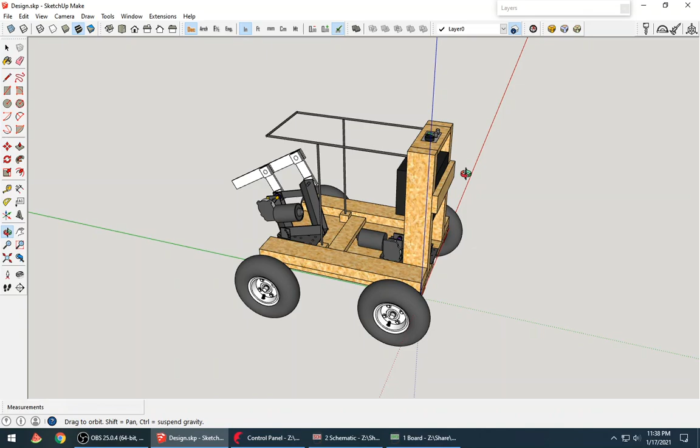I called it Hard Raker. The whole thing uses one motor to go backwards, adjustable here, and then another motor. These are, I believe, windshield wiper motors for cars, and this one rotates this arm which the rake head is attached to, so it just rakes while it's going backwards, and it's really tiring.

I thought about this a couple of months ago, on the grass when I had a spot with the fungus or whatever. I treated it, but whatever died, and I just raked it to get to the bare soil, and aerate the soil a little bit.

Generally, I'm having some thatch problems. Not so much a thatch problem, but the soil, I believe, does not have that much organic activity, like microbial activity going on. That's why I'm doing the compost. I'm trying to establish a good soil, at least the top inch, so it can decompose the dead grass and leaves itself.

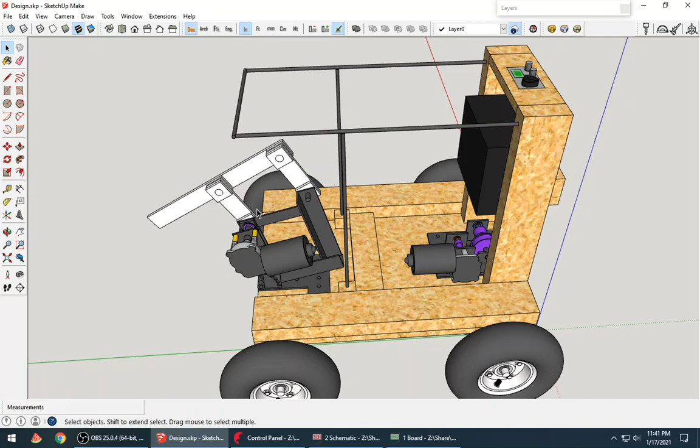This will help me get rid of that. I already used this. I made some changes, some adjustments for the belts. Okay, let's start from the rake part.

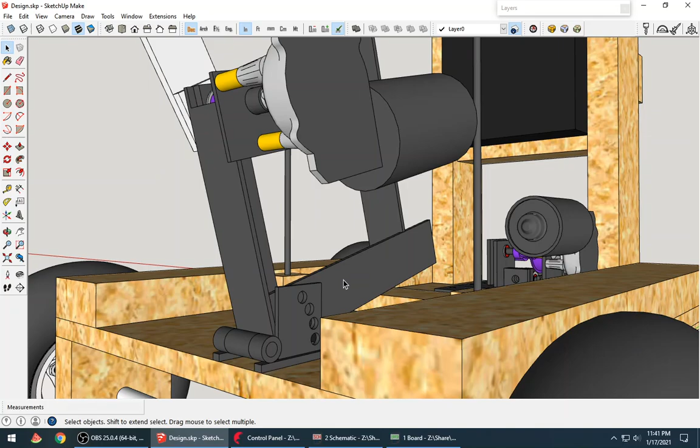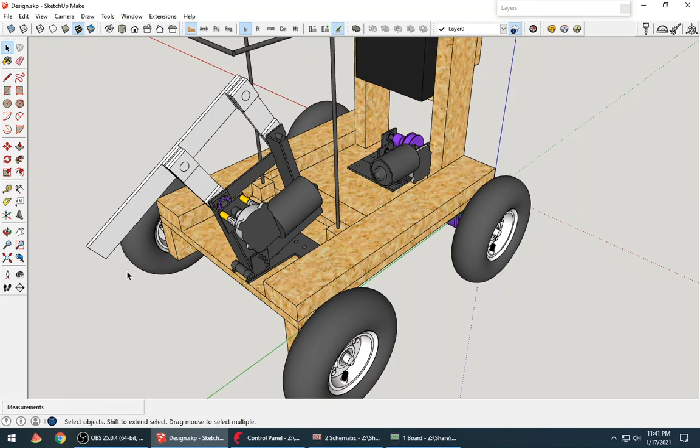It's just a hinge here so we can tilt this backwards and forwards. The motor turns in one direction, and it rotates this linearly, but in a circular motion, which I don't know if that makes sense. So it does the raking action that I want, and I can change the angle. Later on, I filed between these so it's a continuous circle.

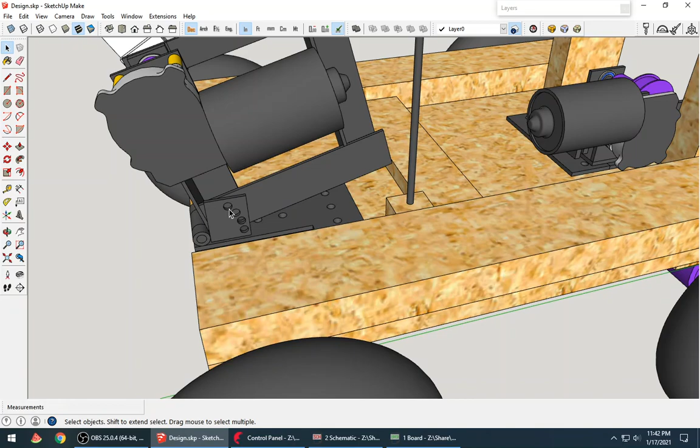Because of this, when it's straight, it has a 15-degree angle built in. So even if I put it flat, it still has 15 degrees, because nobody rakes horizontally. You usually do it standing up with some angle. That's why there's a built-in 15 degrees, and then the first position is 0 degrees, making it 15. Second is 15, making it 30. This is 30, 45, and this is 45, making it 60. I don't think 60 works, because this thing doesn't have enough ground clearance, and 45 doesn't even work all the way.

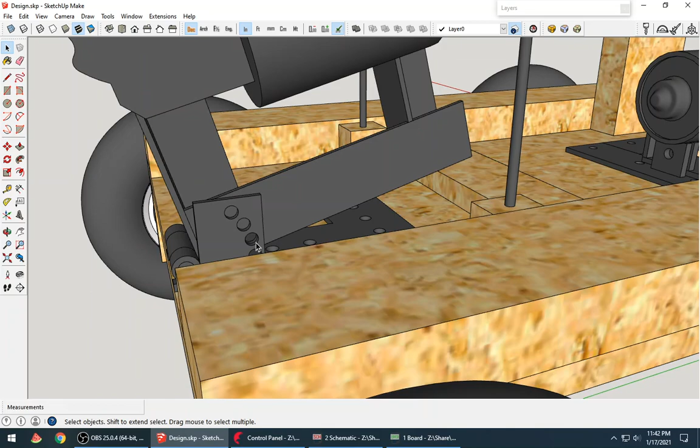So I filed these two, I believe, and between them, it's adjustable from here to here. I should maybe file this one too, just for light raking. Anyway, that's that part, and now the front, the drive part. The front wheel is just a dummy, it just rotates, so there's nothing to it.

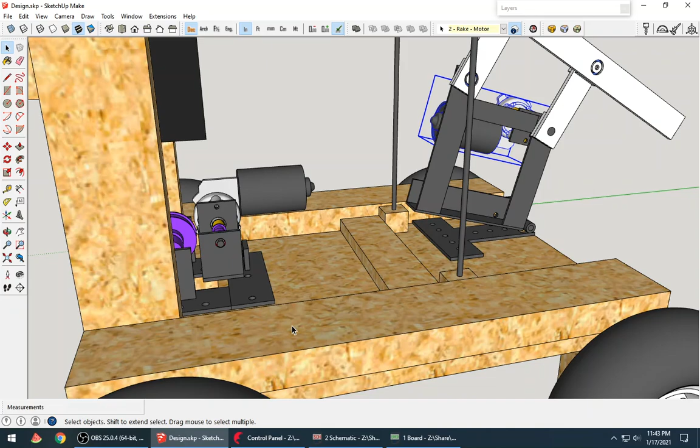The back, however - this motor right here for the rake is 150 or 160 RPM, and the rotation speed is adjustable. I usually use it at 90% of the speed to get anywhere fast, and I drive it very slowly, perhaps half an inch per second, up to an inch per second.

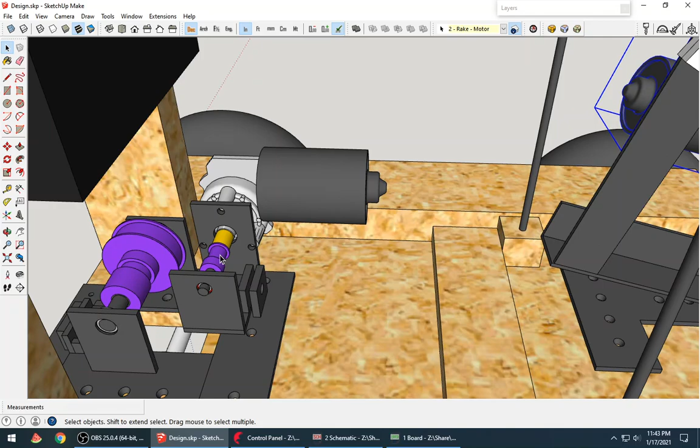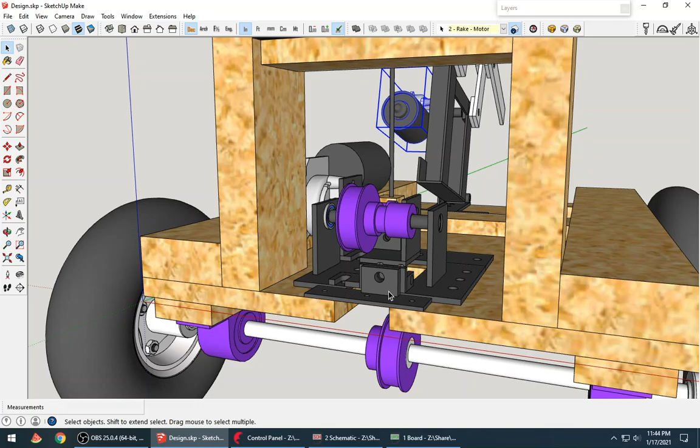Because I want to do that, this motor under load is 40 RPMs, and I have two sets of pulleys. This is 15 tooth to 60, which is 4 to 1, and then that 60 is rotating coaxially, rotating this small one, which is 20 to 40, so 2 to 1 there. So 4 to 1, 2 to 1 is 8 to 1. So each 8 rotations of this is 1 rotation of that. That's full speed, and it's adjustable. That's the drive one, that's the rake.

So I usually crank the rake all the way up so it does it really fast, and then the drive is very slow, so it just thoroughly rakes it.

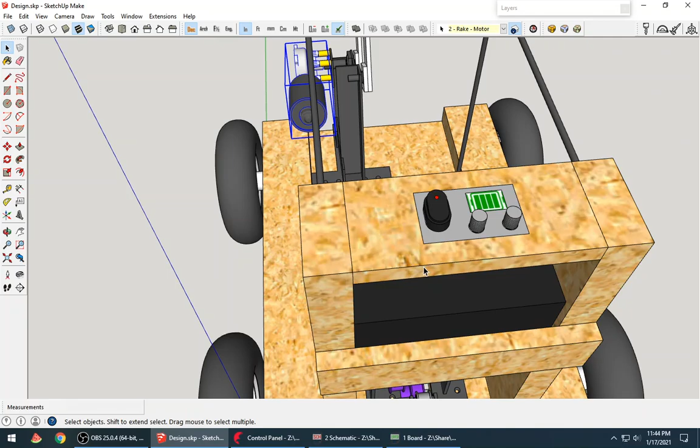By the time I've done it - I haven't made any videos this weekend because I had an issue. This is the old one, actually, the old pulley. You see how this has the flange limiting the sides over here. This one didn't have it. I ordered a new one that has it now, and because it didn't have it...

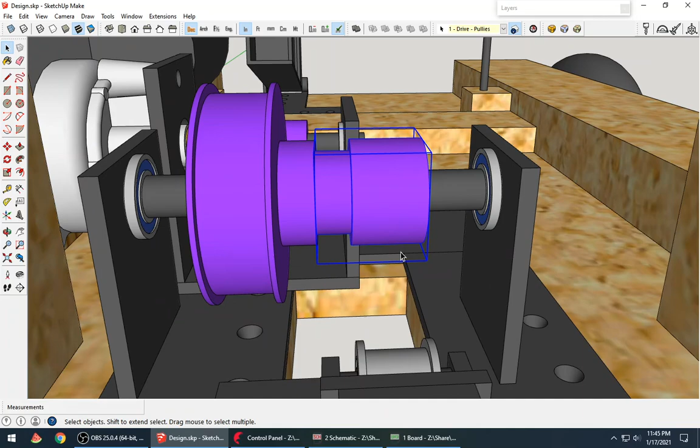Before designing all these, tensioning for this one, which it didn't originally have, and the bearings - all the purple ones are the ones that I got from somewhere. Well, of course the wheels too, I don't make wheels.

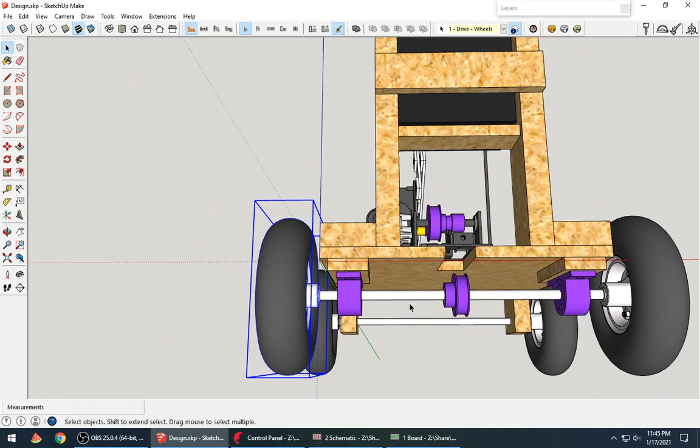There's no point. So putting the belt on is painful, but since I wanted it kind of tight so it wouldn't slip, but it did slip, and this has no protection, no limits on the end, so it's just going to slip this way, and I think it destroyed that belt.

So I was waiting on that belt. Originally I was going to make a video, which I did, a very short one. I sent it to a couple of friends.

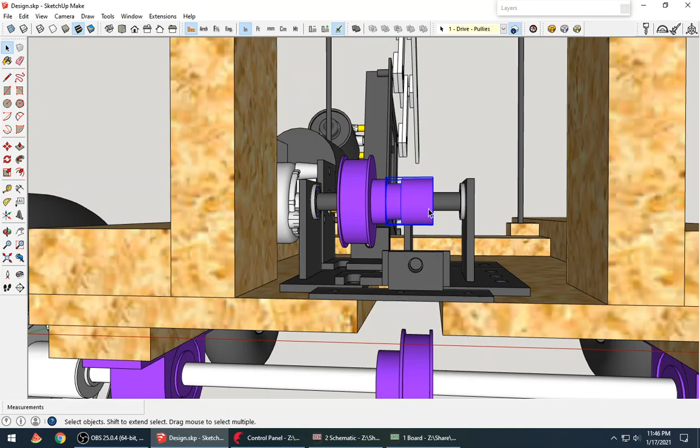But I redesigned it, I need to redraw this - this is not the correct one now. I have one with the flanges in this, and I did the tensioning mechanism here, so it goes down. I have a bunch of stuff here, so it goes down to here, comes back up, and then this pushes using a screw here.

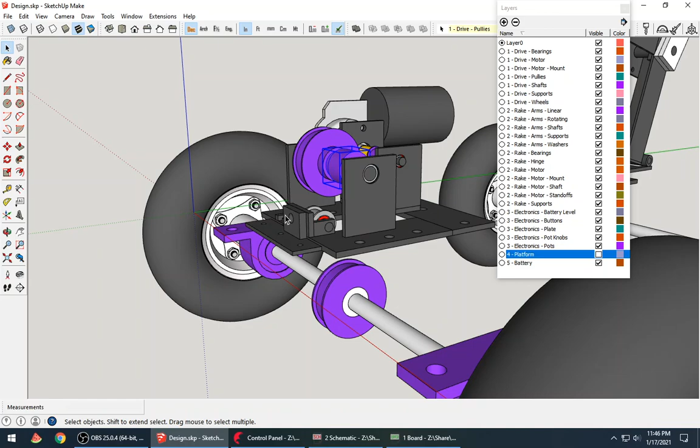Pushes, and then once I get it to a good tightness, I screw the whole assembly. All that stuff gets pushed against because of the screw, so it kind of keeps it in place, tight belt.

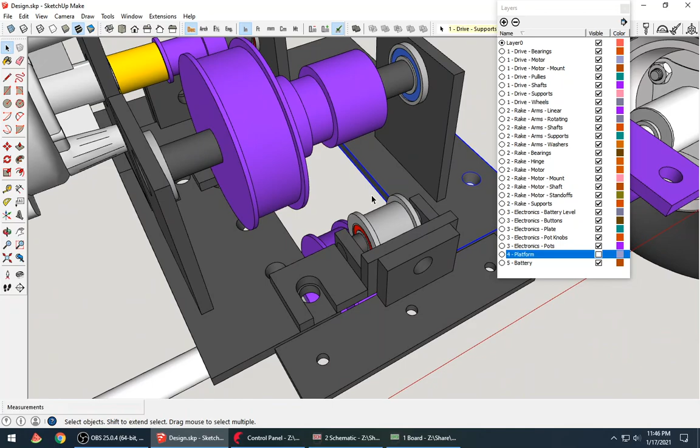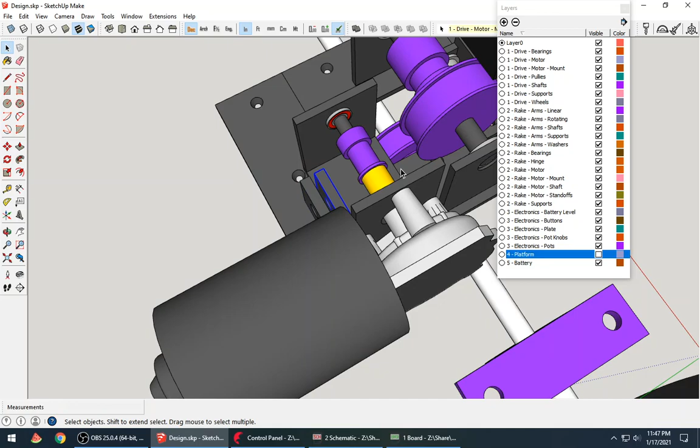However, on the back one, I did it a little differently. This actually pulls it, so the whole motor, the motor stand shaft, and the bearing are in this carrier, which is pulled through. This part is stationary, connected to that. This has threads, this doesn't - it's just a clearance hole. So when you thread this and tighten it, it pulls the whole assembly this way, which tightens the belt.

That goes around here. And again, let's get through this. When you're at the point that the belt is tight to your satisfaction, you just screw it down and hold it in there, and both of them are acting on it. It doesn't move.

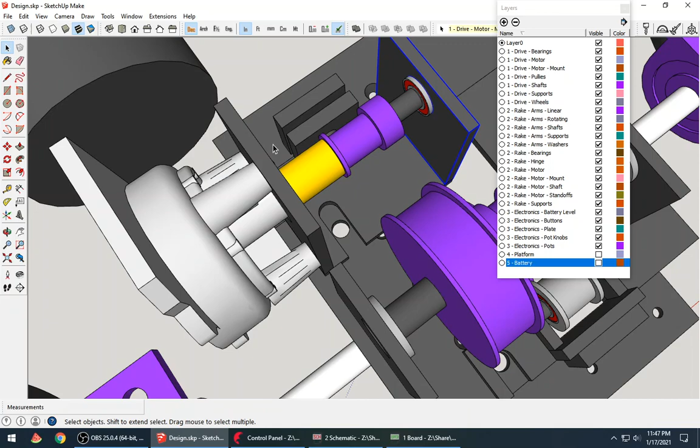So in a nutshell, that's what it is. It runs on a lead acid battery. I think it would last about 4 or 5 hours. I can probably do most of the yard.

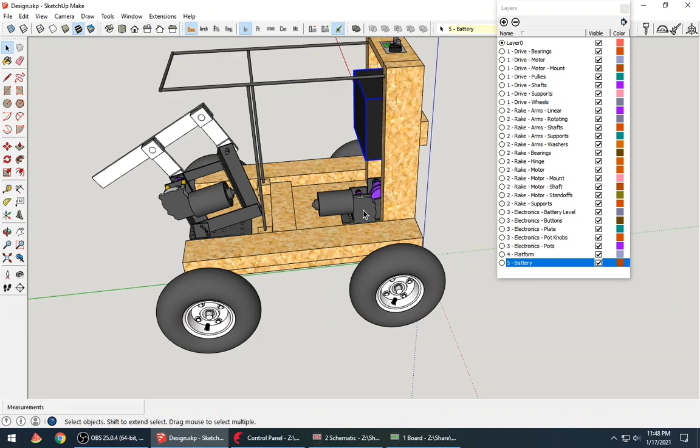During my testing, I already did my front yard, and I divided it differently, but in total I probably did like 2,500 square feet, and that was about 1.5 hours. So it would take 6 hours basically, because I have around 10,000 square feet of yard.

So yeah, this metal thing I did not align when I welded. This one is for a cloth that I'm going to put on - well, I did already, and I stapled it around so it doesn't look like something idiotic.

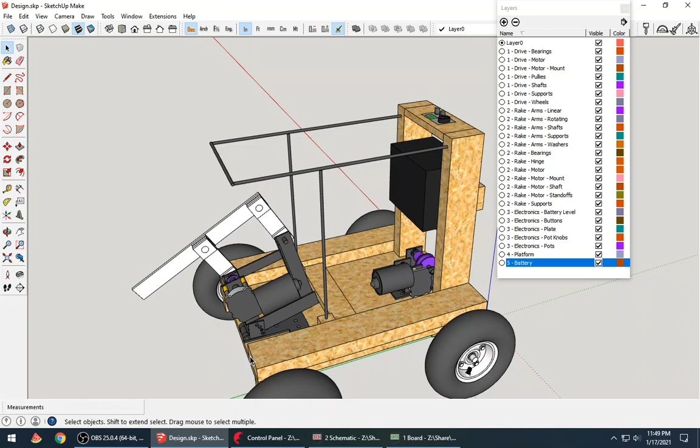So in the next video - well, the controls are simple. There's a store-bought one, whatever I bought from MPJA. I modeled it in here, all that stuff. It's like a regular lead acid or lipo - well actually, I got it from Amazon.

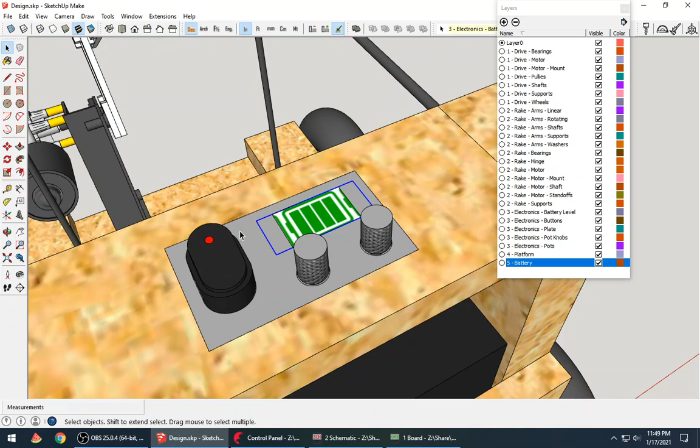Anyway, it's a battery meter, and there's a master on-off switch, and once it's on, lights come on. Then you twist this clockwise and it starts raking, and you twist the other one clockwise and it starts going backwards - it only goes backwards.

So both motors only go one direction, so I don't have to use a full bridge - all I need is a half H bridge. There's a chip for that.

I've used it before. I actually designed a remotely controlled broadcast spreader, and I've been using it for 3 years now. I took a Home Depot Scott's small broadcast spreader and converted it to operate on a platform similar to this, but it can rotate.

The front wheels are the drive wheels, and they each have a motor, so it's a differential steering setup. I have big casters in the back so they follow. At some point I may put a video out on that one, but I've been using it and it's been wonderful, because my backyard is a little inclined, and even with a small broadcast spreader, it would be a pain to haul around.

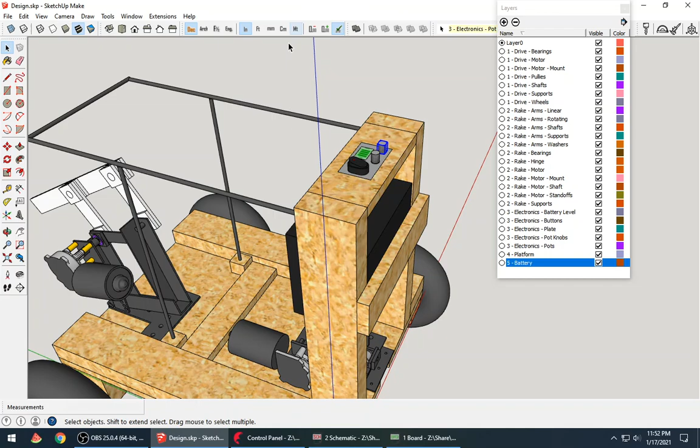I don't know why I'm talking about the broadcast spreader, but yeah, it looks similar to this - same wheels basically, I think. I'm looking at it, I may have like 13-inch wheels on that one. These are 10-inch wheels.

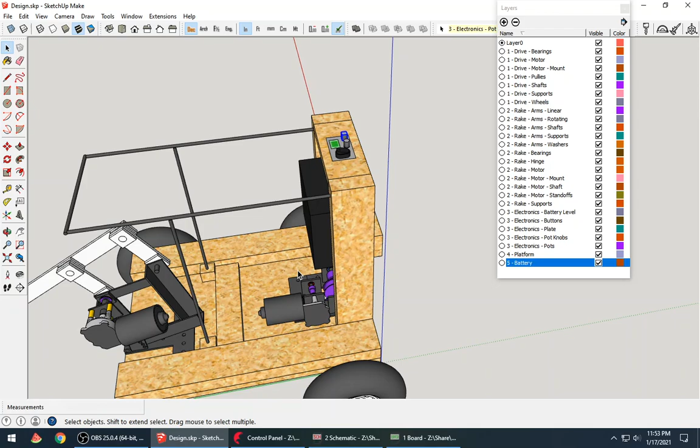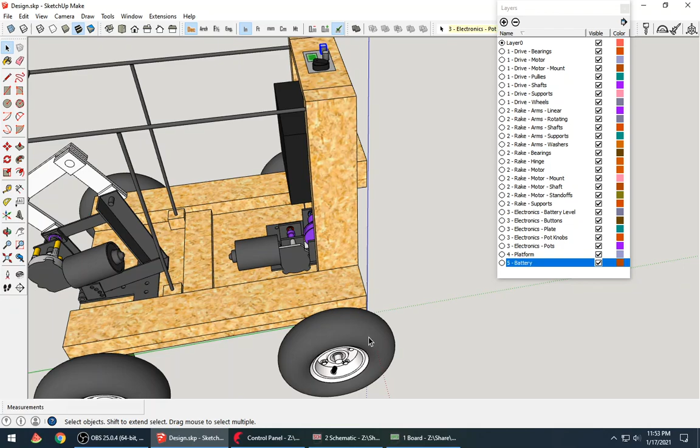Anyway, so this also needs to be weighed down. I bought an anchor at some point from Walmart, and I'm planning on putting it in here - it's like 20 or 15 pounds, because even the battery weight isn't enough to get traction. I may lower the pressure on the tires, since they're pressurized correctly right now, but if you lower it, it's going to have more friction and more work for the motors. But the way it is, 8-to-1 basically, it has good torque, so I don't have a problem with either motor - they've been working fantastic.

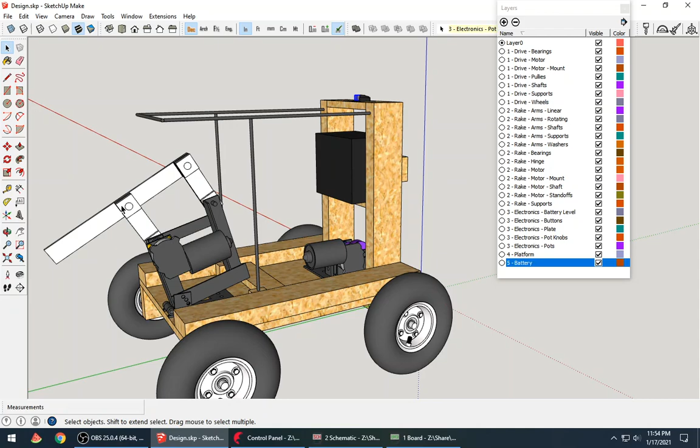I just wanted to say something about this mechanism. It almost resembles a locomotive engine's wheel linkage, and those are inherently bad design. So is this, because the motor turns this one, and this one is connected to it and is freewheeling. There are bearings inside, certain kind of bearings, they're all the same, and it's driven by the motor in here.

Immediately I thought about this, and when I drew it out I was like, oh crap. You can see, and I can do the maths and prove it, there's two quote unquote nulls, undefined really. You kind of need to undefine the position, the uncertainty, basically, when they align.

When these are rotated all the way this way, they are in the same line, and I have weight in here of course, that kind of alleviates it. But my point is, if this is here and that's there, that's one point. And when it comes back around, this becomes here and this becomes there - that's the second point of uncertainty.

They could rotate in a weird way and get locked, and then the motor would strip the crap out of these things, or the plastic bearing, the worm gear.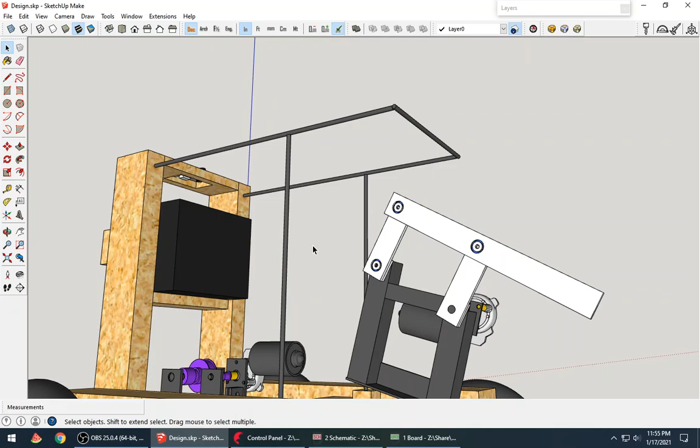To overcome that, which I did not bother to put in here, I welded at a certain angle a 1.5 inch flat plate, and then put a spring to connect here. What that does is overcome the weight of the rake, and it helps with accelerating the motion.

When these arms are in those two null points, it works, but even if it works it's still inherently bad, because it has to be perfect for it to smoothly work, and there's no such thing. So it hops, making this periodic motion depending on speed, it jumps, and of course rattles the whole thing.

I'm thinking about maybe a tuned mass damper - I don't know, skyscrapers have stabilization, anti-vibration, like it dampens the vibration. Yeah, we'll see, but it's working.

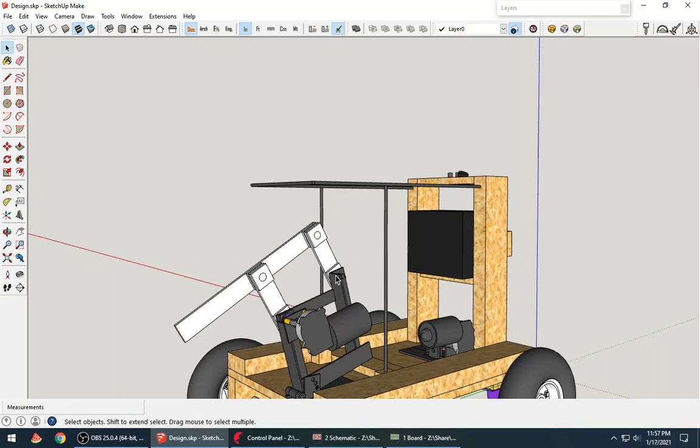Oh, you would not believe - let's say a 50 feet stretch in a straight line, and the rake is 24-inch wide, I pulled so much dead debris, dead grass and some leaves.

It was huge. After I'd done pretty much the whole front yard, 2,500 square feet, I was able to pull off probably a little over 10 cubic feet of, not compressed, but as it is, this nasty dead grass and leaves.

So what if you leave that? What happens is, according to information I read from universities, my interpretation is that layer is going to do a couple things. One, it's going to hold in the moisture, which is a good thing, but for a moist and already humid place, it's bad, because you don't want humid conditions on the surface - that triggers the fungus.

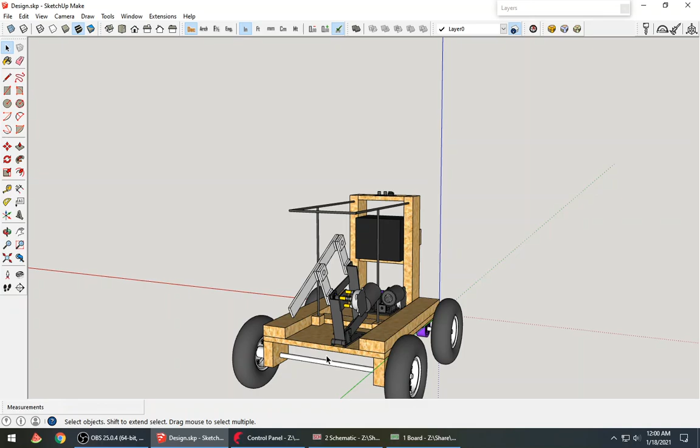So anyway, I've done this raking on a small part. The whole reason I did this is it sucks - just a little, probably like 15-20 square feet, took me a long time, not to mention the energy and the repetitive motion. We're just not meant to do this kind of stuff, at least I'm not used to it.

Doing the whole yard would be unbelievable, you'll be there a week. So this thing - it does it just like I do, I just set it up and it goes backwards. I just need to go catch it in time so I don't run into my cars or whatever.

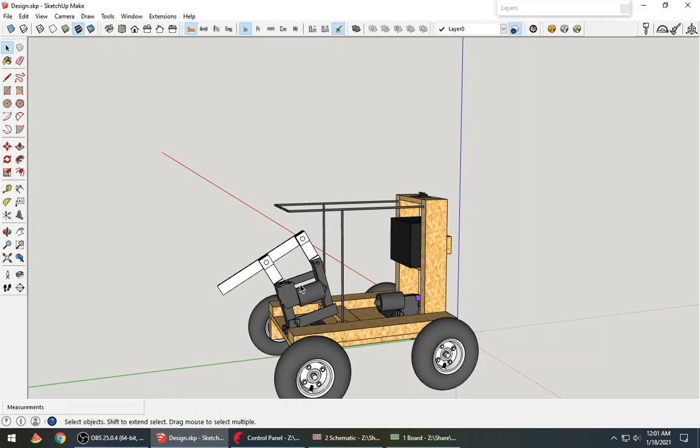But other than that, it works wonderfully. When I have the video up operating it, probably tomorrow - probably not, maybe next weekend, because I need to work and finish a project at work.

But it will be there, or I'll upload a brief video with sarcasm that I sent to my friends.

But other than that, I'm very happy with this, and it's gonna help me a lot. I was aching just looking at it working, and a lot of people slowed down asking what is that. I was like, I don't know. There's some moving and dead grass coming out, and that thing on the tip is just like a rake.

Some people, I don't know if it's a problem with them or we live on a slight turn, but there's something on the yard and someone's standing there, and they don't even look. I don't care if they look or not, I'm just observing the behavior. I would notice it, but the awareness is just not there. I was surprised, maybe a quarter of the people who passed through while I was testing this did not even notice, or they just deliberately didn't look. I mean, it's not normal either, but I don't care.

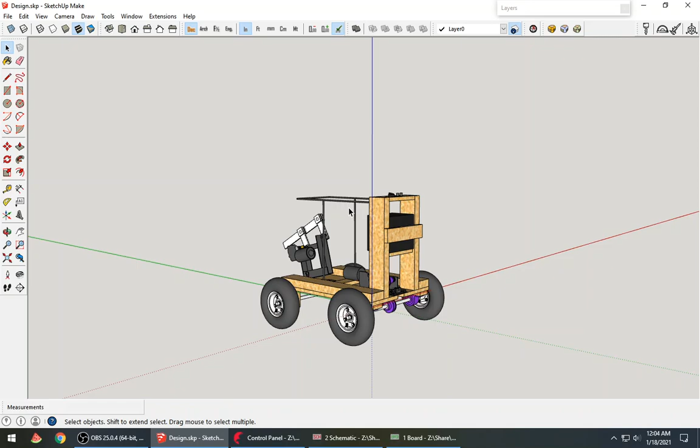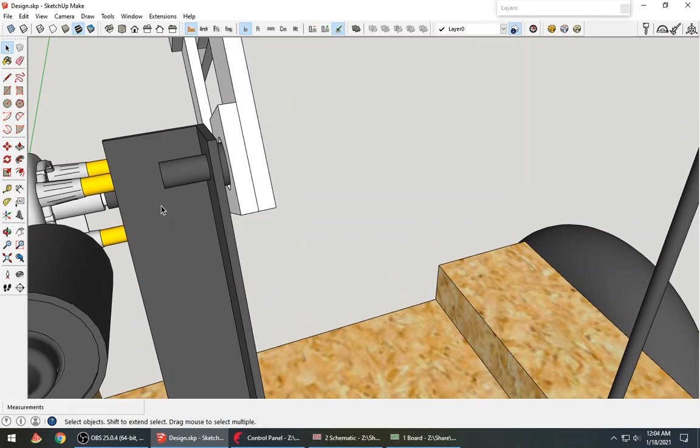Problem is, like I said, this knocking behavior when it's working is destructive. So at least this thing, which I had to loosen up to make the knocking a little less - this part is wearing out, even though I have some rubber in here. It's still threaded, and I don't do threaded stuff on SketchUp, it's just painful. I'm sure there's an extension for it.

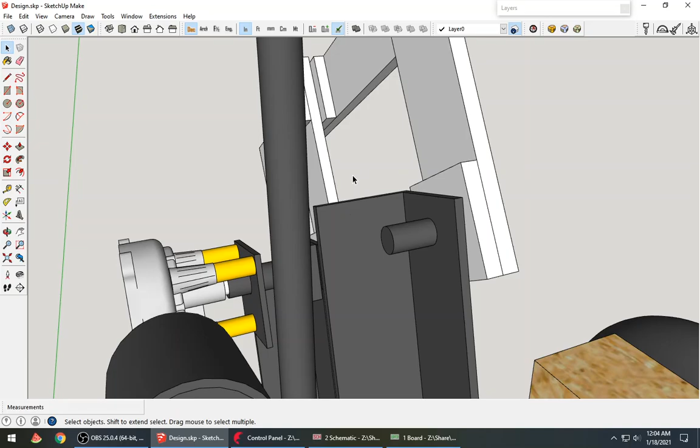Yeah, there was some stuff anyway. So that's the whole deal, and you'll see it functioning. I will not put the cloth over it, so you'll see that, except for the colors, it's exactly the same thing basically - well, except this thing looks a little different, but everything else.

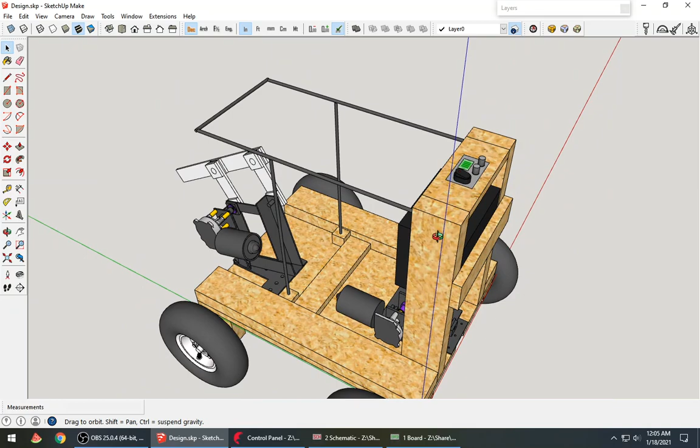And I've done, besides these buttons and stuff - these are knurled, I made that, I made this. Of course cut these, cut the wood, bought the battery, bought the pulleys, wheels, and 5/8 rod. And this is all thread - it didn't need to be, but I just didn't.

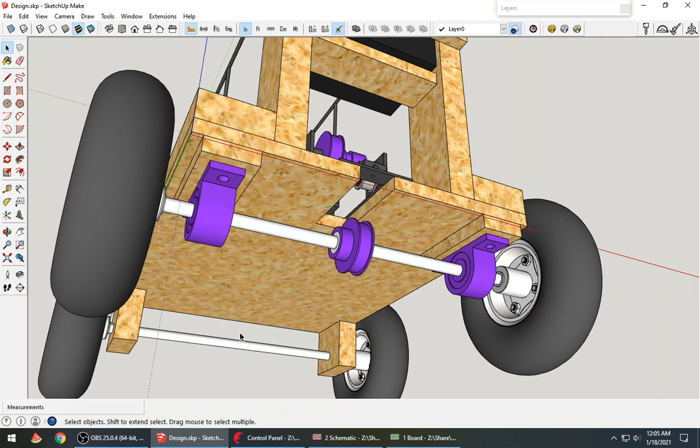I don't think I have 5/8 threading, so I can thread this end and screw this thing in there. So I just bought all thread. Of course, pillow blocks I don't have - I can make them, but what's the point? They were $15 for two.

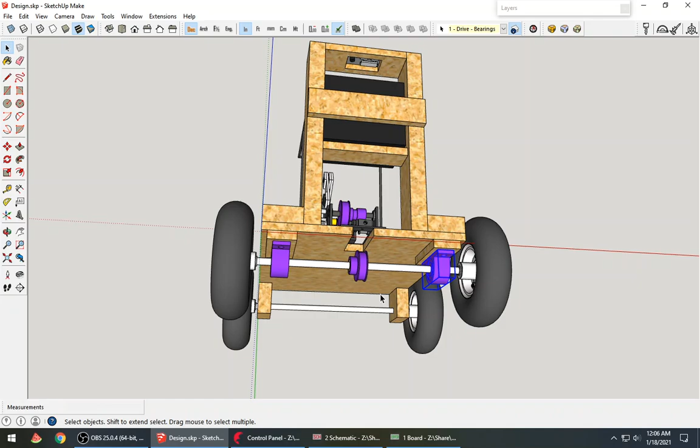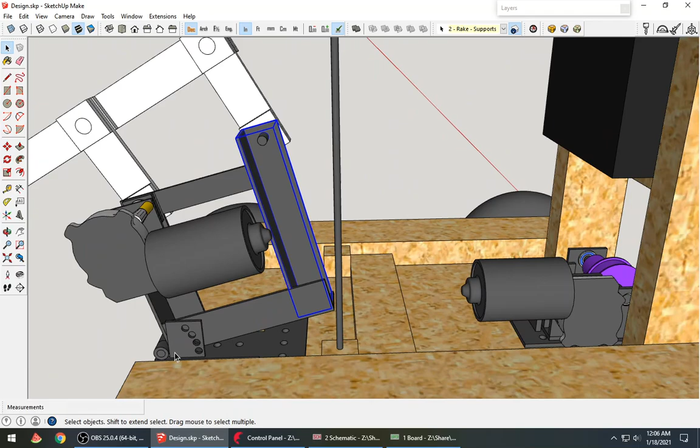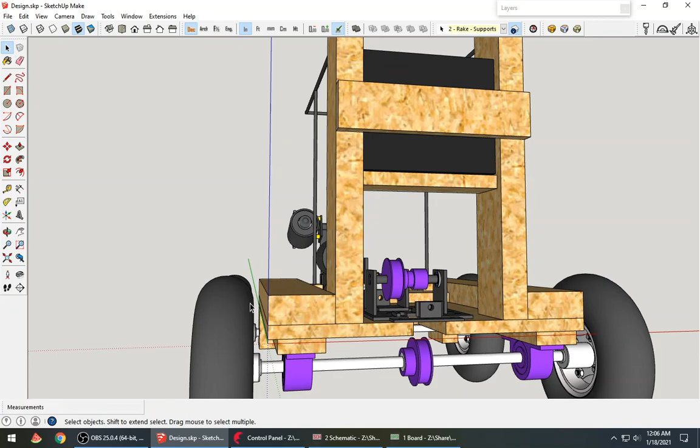At some point you just can't waste time, and I already do that. Of course bearings I bought, motors I bought, but the rest of it - assembly and the design, measuring the pattern and how it needs to be, where to dig, where to drill, tensioning mechanism - may look stupid, but it works wonderfully. Yeah, it's rock solid. I just need to put more weight or lower the pressure in the tires to provide more friction to have it operate more smoothly.

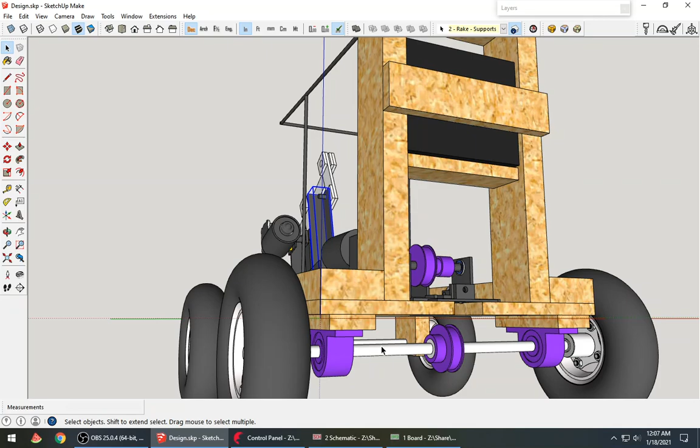It's just one issue, it actually goes off track because either these aren't aligned - I'm just pointing at the wheels, they may not be aligned correctly - also it's on a slight incline. We have big oak trees and they are kind of above their trunk, and then around it, it's going down, so when it gets to the grass around the tree, it's on an incline sideways, which causes it to go off track and stuff.

I thought about maybe making it just like the broadcast spreader, put two motors, differentially steered, whatever they call it - differential steering - so I can actually remote control it, or even get fancier.

Bought a kind of expensive real-time kinematic thing that has a unit to put on this device, and then a base station - put it in a fixed location around the house so it would provide location information within 2.5 centimeters, like an inch. Then put a geofence around it and have it just go at it, put some sensors for sensing the trees and molds and blah blah - just let it go and eventually, kind of like a Roomba, it will finish doing it.

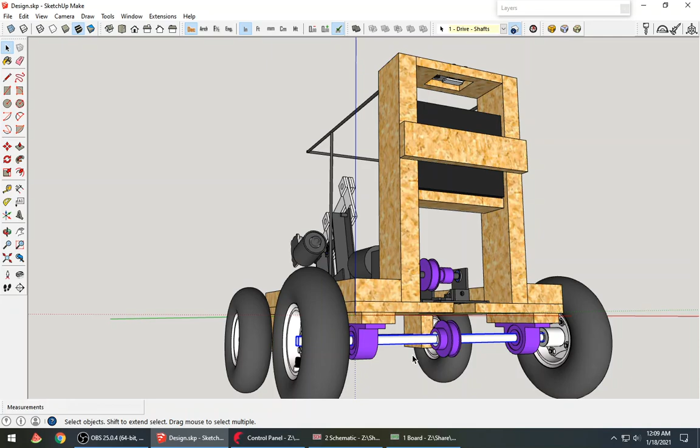Anyway, but nah man, it's just too much. I just set it up and it just rakes all the way across the yard and I turn it around, do it again. I'll probably use it on the weekend - it's not a weekday kind of thing. I can't be getting off work every 20 minutes to go outside, that doesn't work.

So the next video will be a live demonstration, and the circuit itself is not...

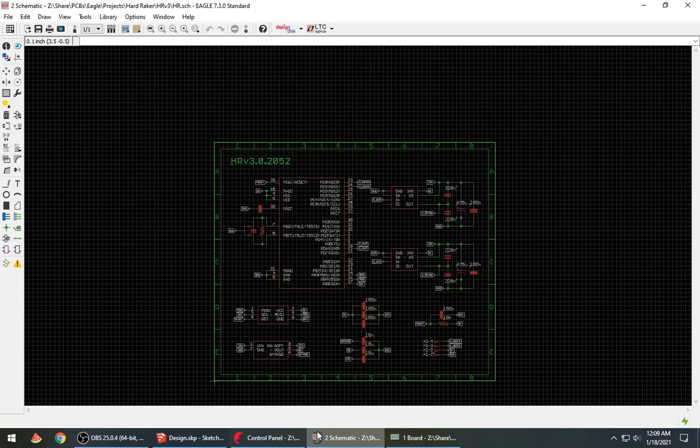I've used a processor. I didn't have to. All I'm using it for is getting those two potentiometer inputs, and depending on where they're at, it's all the way this end, all the way the other end - full speed or stop. That's all it is. It's a pathetic reason to use a processor, but I just wanted this to work.

I don't want to design it all. This is version 3, by the way. There's a reason it's version 3. Because the others were like, oh, I'm gonna use a PWM generator, a proper one, not this freaking 555 timer crap.

One thing is that this is the Arduino - the chip is the same processor that is in Arduino. So ATmega 328P, with an Arduino bootloader. I'm using digital pins 5 and 6. It's PWM frequency, which I use to drive the drive motor and the rake motor independently.

So what the problem is, it's 1 kilohertz. Roughly 1 kilohertz, 960 or something hertz. Yeah, that's perfectly in the audible range, especially the irritable audible range.

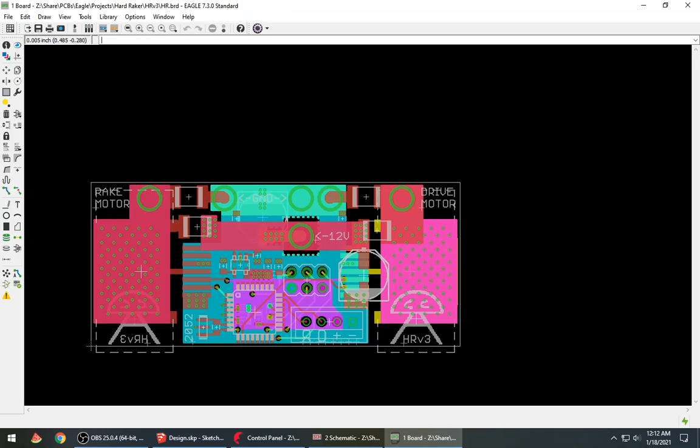But these windshield motors I use for this, it's nothing really. So it's a 4-layer board and blah blah, I didn't even bother to design it and put it in there. So there's heat sinks to it.

If I highlight it, there's here which should be connected - this one I do with the flood and polygon. So these are actually for the heat sink for this thing. It looks like - when you look at it from the side, it looks like two T's right next to each other, looks like a wing. It's perforated - there's venting holes in there.

These don't even get warm because I think this 8962 is rated up to 30 amps. Each of those motors is probably at most like 5-6 amps max, and for the rake one, I'm using it closer to 100% duty cycle - not quite, but still really close. So it may be pulling 6 amps. But I checked it - the heatsink is not even warm.

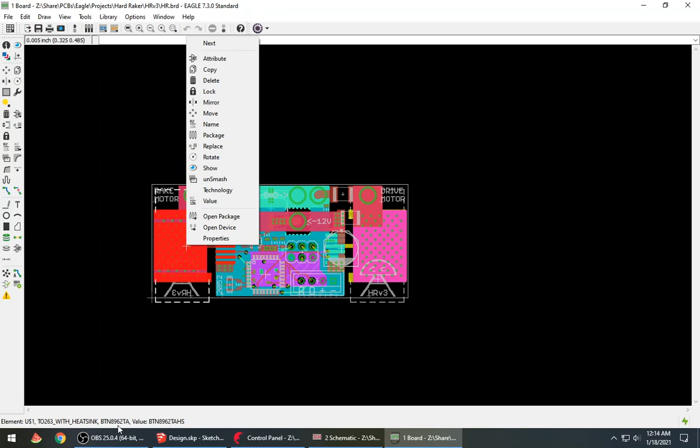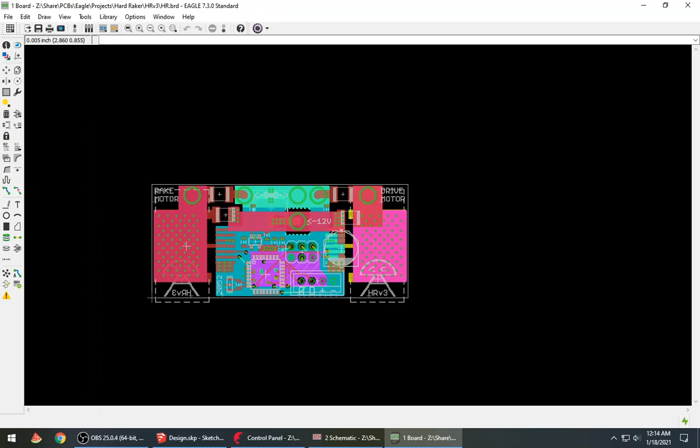The drive motor, oh my god, it's driving so slowly. Full speed is about 5 RPM, I use it at about 10% duty cycle, so it's very slow and makes an annoying sound, both of them, because they're both driven by the 1 kilohertz PWM signal.

So yeah, next one - I mean, this is stuff that I do because I need it. I don't need it, but I would like to have it. It's making things a lot easier. And this is one of those things that I made, out of many others, that is just absolutely useful.

I was so happy. I was just laughing while I was trying to pack the dead grass into trash bags. Oh my God, it's gonna be so good. Hopefully less fungus next year, and fertilizer will actually be getting in there. And of course I'm doing the compost, so when I spread the compost it will actually contact the soil as opposed to sandwiching the dead grass between the soil and itself.

We'll see. My plan is to make the grass very thick within a couple of years, so I wouldn't have any of these problems - it chokes the weeds out and gets strong - but we'll find out.